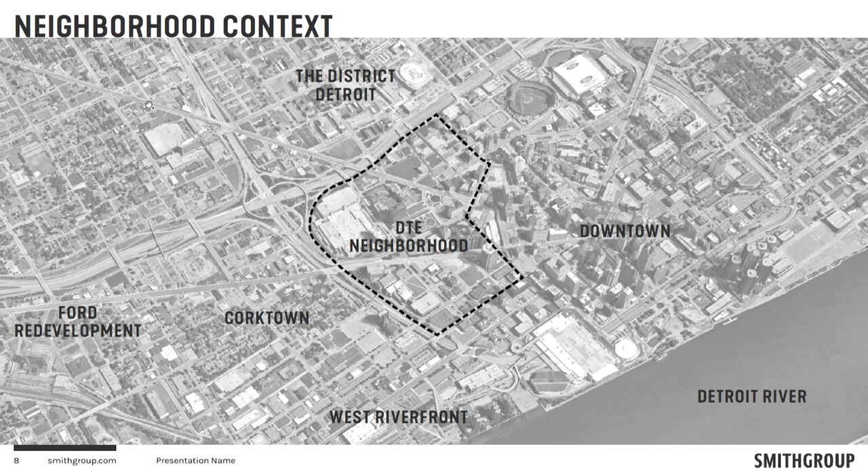But it is right on the edge of downtown, and you've probably all heard things about what's happening in Detroit, and downtown is just incredible. The District Detroit to the north is the entertainment district with the new Little Caesars Arena. Corktown with the new Ford redevelopment of the train station just on the other side, and West Riverfront with a new park coming, $50 million new park on the riverfront, and the whole connected green spine along the Detroit River that now is getting close to meeting up with this neighborhood.

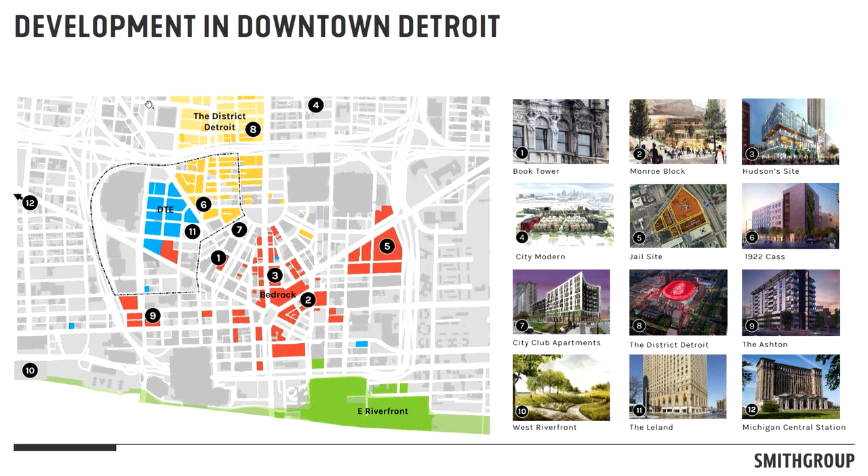Again, partners on all sides that are doing great work in redevelopment and making things happen and creating a sense of identity have been brought to the table to be participants and help DTE understand what's possible here. But just for a sense of scale, 3.5 million square feet of development underway just in 2018, and 1.5 billion being invested, and this is just on all sides of the neighborhood.

So what's interesting is there isn't a big resident community. There's a limited worker community, mostly DTE and a couple other institutions. So we brought these other neighborhood partners to the table to start to envision what might be possible here.

And these were city leaders, nonprofits, mobility experts, and these development partners to envision how green space and green infrastructure can be a driver, how affordable residential options can link community amenities into the program. So the desire and the need for schools and early childhood centers linked to affordable housing, linked to these employment centers.

DTE alone is a huge employment base within this neighborhood, and how can it better serve both its employees and be a great place for downtown workers to have a neighborhood that they can afford and call home just blocks outside of the downtown core.

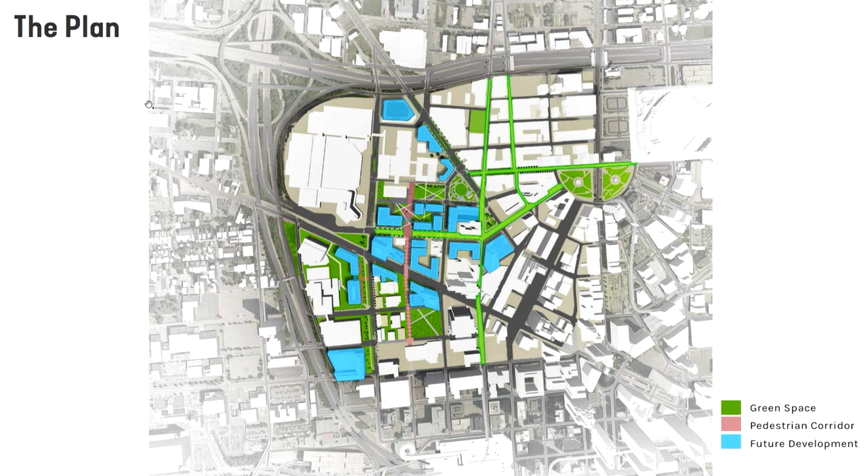Detroit is not a city in a park. It is not a city of parks. The parks that are there are relatively underutilized. There's a lot of land.

There's a lot of land that's green, but that land isn't a land that people in the city connect to, feel welcomed in, or feel like they can utilize, and that isn't really successfully performing any value. So it's shaped around new catalytic development that can help anchor this as a new downtown neighborhood.

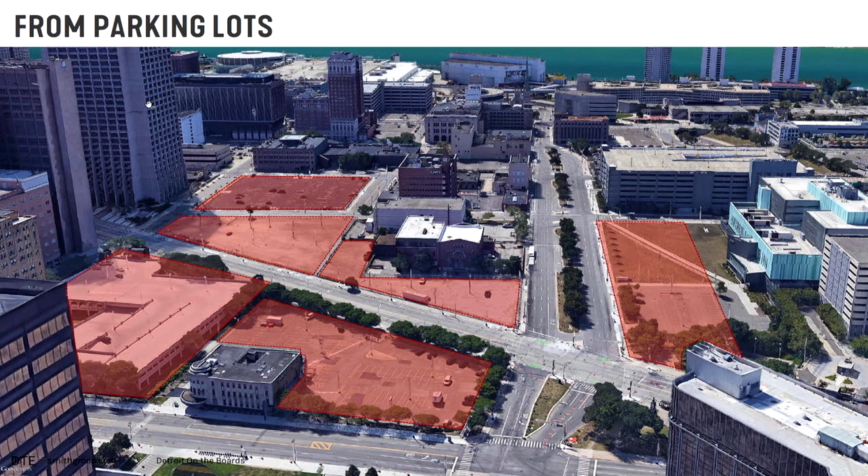With the Detroit River in the background, from the windows of the headquarters just to the left, how can we take parking lots and very wide streets and rethink them with new developments scaled with pedestrian spaces stitched throughout, places for people at multiple levels. We're thinking about roofs not just to support building systems, but also for energy, public space, and landscape.

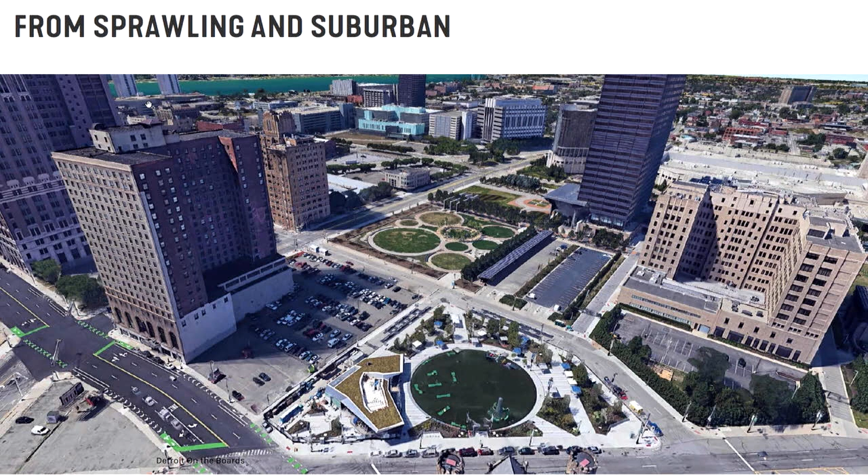Looking at greenway connections that are really ecological corridors connecting back to the river, and at this sprawling suburban environment that exists today with defensive offsets the landscape provides, thinking about how these places can shape the experience in the neighborhood with new development that's scaled and transitions down to allow light into these spaces as development emerges, integrating early child care centers into the core so there's a well-distributed network.

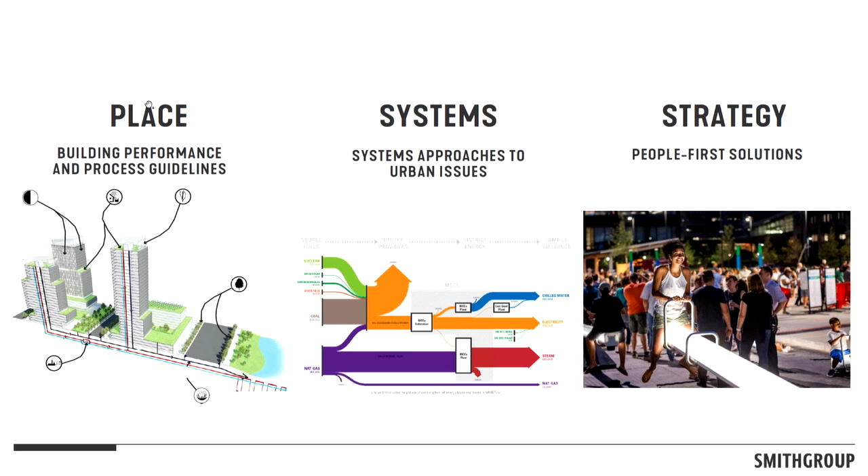We're thinking about all the layers, including how places are created and how building systems interact with the landscape, and the larger systems approaches to doing this. DTE only owns a certain degree of this land, but they have the opportunity to lead and to shape how all the other partners surrounding them can be more thoughtful about developing these systems. This is just initially in the works, but really thinking about a people-first strategy.

Oh, that would be wonderful.

That's where letter B is, 2nd Avenue, which has been closed with private, larger parcels that have been conglomerated. We reopen that as a pedestrian spine that links stormwater from the headquarters open spaces down to a new, larger district-scaled stormwater park where letter C is located, then linking those all the way down to the riverfront, both in open space and stormwater systems. The darker and medium gray buildings are all new developments within the area, and we ask how those water systems can be linked into this network as well.

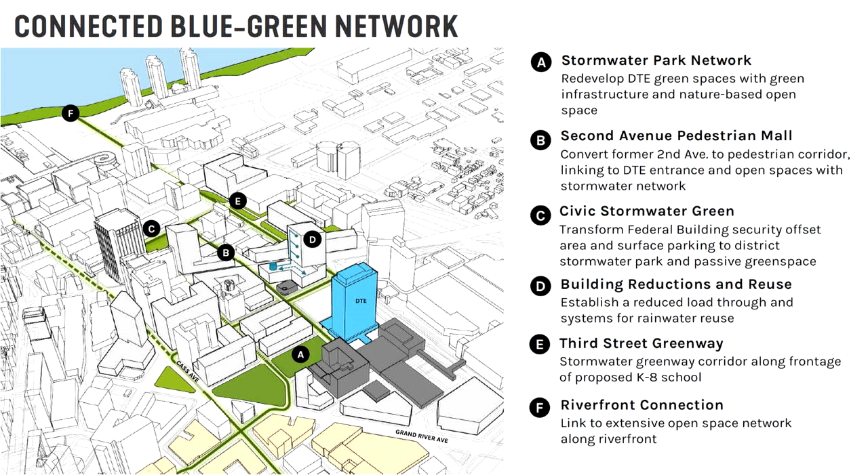For connectivity, we're planning enhanced bike systems, off-road as much as possible, particularly where letter E is along 3rd Street, which connects down to the Detroit River. That's the extra wide street we can now repurpose and rethink so that width is utilized as a great green connector all the way to the riverfront. Suddenly those six blocks that feel really far away feel short and connected, and this is all linked to a much larger loop that's citywide.

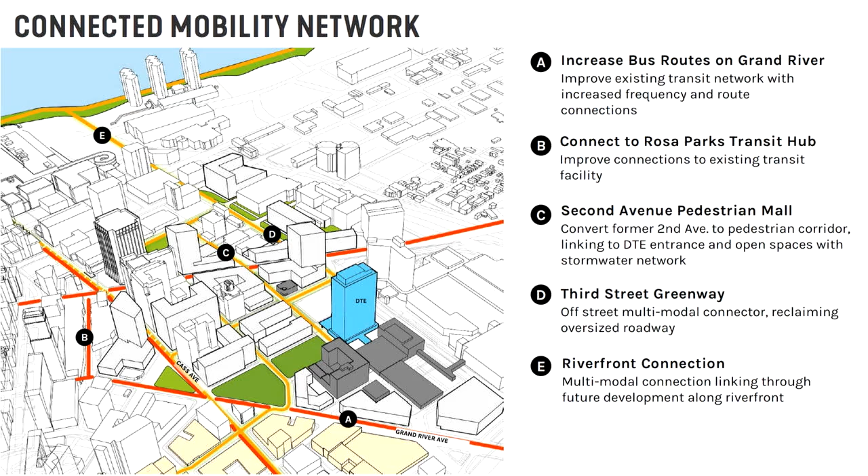Also linking with the bus systems and bus networks, decreasing wait times. All of this has been initially coordinated, with a lot of collaboration between all the entities about what's possible moving forward. And then, of course, the other systems and the building systems and how those can translate at a district scale and a site scale.

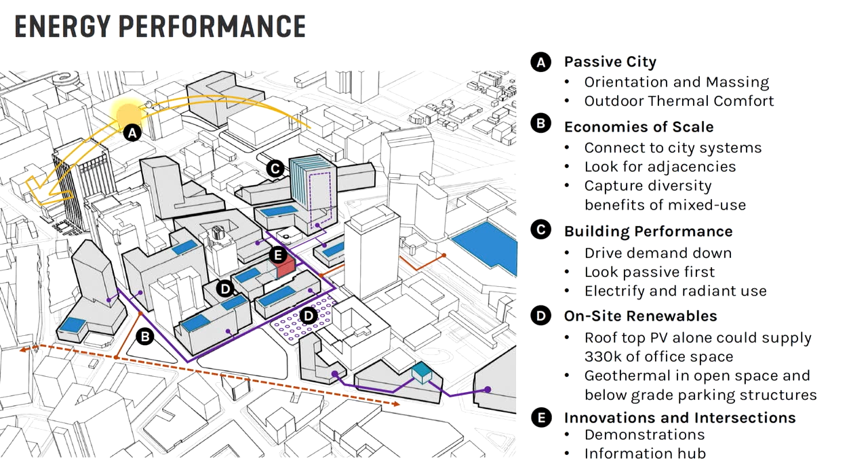When we're developing the plans for the park, how are we thinking about the opportunity for geothermal? When we're talking about the rooftop systems, how are we thinking about photovoltaics? The roofs alone, there's a large casino that's part of the district—how can the roofs within this network provide energy? Here it could actually supply up to 330,000 square feet of office space through rooftop generation alone, and this is all new potential development.

Really thinking about how innovations and intersections come together. So what can DTE do through their goals to demonstrate what they're working toward right here in their own neighborhood?

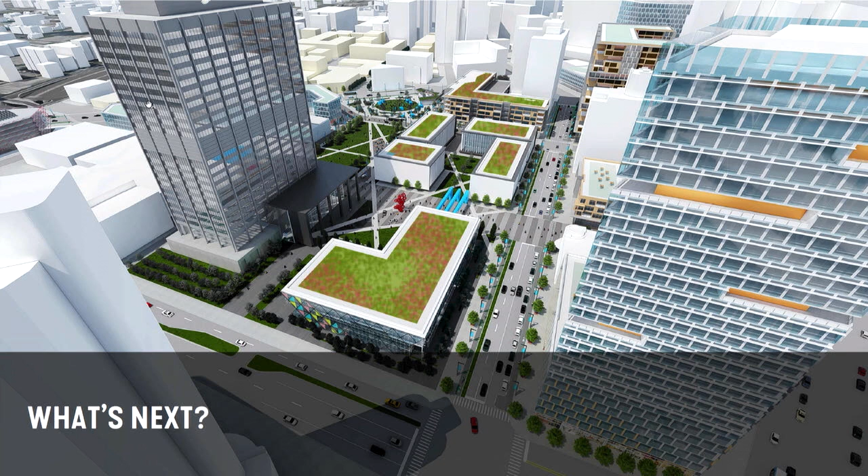We just started the process a year ago. None of this is fully quantified and fully developed, and we're setting the stage, really working with partners who will help envision and finalize this plan. DTE is not a developer; they're not a land developer, and they're not doing all of this work themselves. They're working with partners, but they're able to set the vision and set the tone and bring this work to fruition over the future. So we're pretty excited about what can come out of this as they embrace the opportunity to lead in this area.